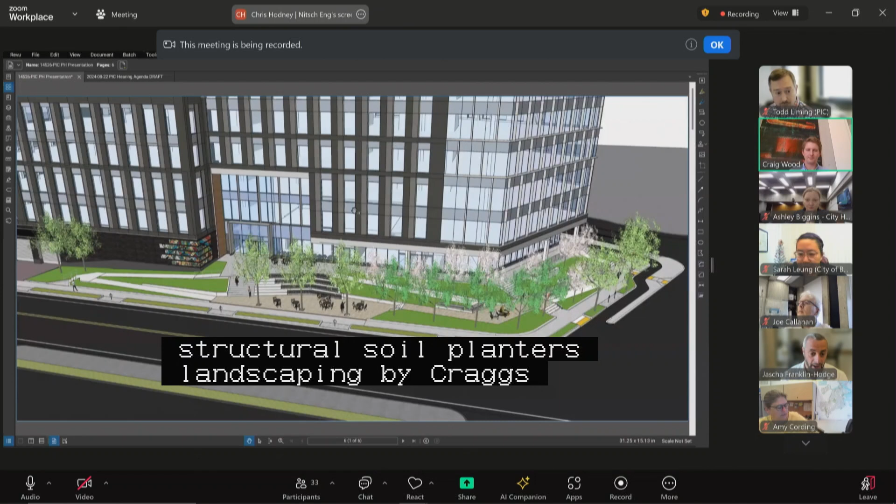Next item of business, public hearing number 1 on a joint petition by 22 Dry Dock LLC and the Boston Economic Development and Industrial Corporation for the making of specific repairs within the following public ways in South Boston, consisting of curb realignment, roadway and sidewalk reconstruction, new and relocated pedestrian ramps, specialty pavement, street lighting infrastructure, street trees and structural soil, planters, landscaping, bike racks, driveway curb cuts, and protected bicycle facilities. Dry Dock Avenue, generally at address number 22 west of Tide Street; Northern Avenue, generally at address numbers 331 to 339 northeast of Tide Street; Tide Street between Dry Dock Avenue and Northern Avenue. This was new business on August 8th, as shown on a set of plans entitled City of Boston Public Works Department Engineering Division Specific Repair Plan, Dry Dock Avenue, Tide Street, Private Way, South Boston, 5 sheets dated February 2024.

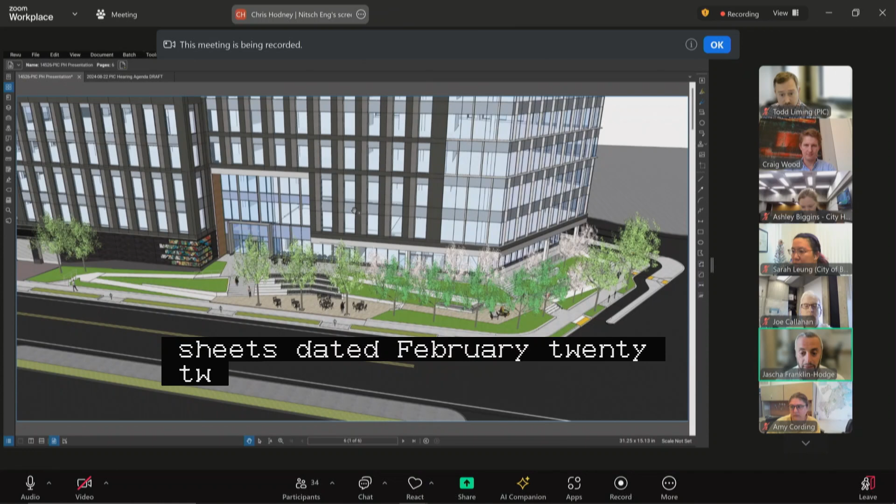Would the proponents please introduce themselves, their affiliations, give us a very brief reintroduction to this project, and let us know about any changes since your new business hearing.

Good morning, my name is Chris Hodney. I am with Nitsch Engineering. I'm joined here by Craig Wood and Paul Flores from Related Beal. 22 Dry Dock Ave, we were here two weeks ago for the new business hearing. It is a life science building in the Boston Marine Industrial Park, at the location of the old 22 Dry Dock building. Same address, but where there was a bunch of city offices, adjacent to the EDIC garage.

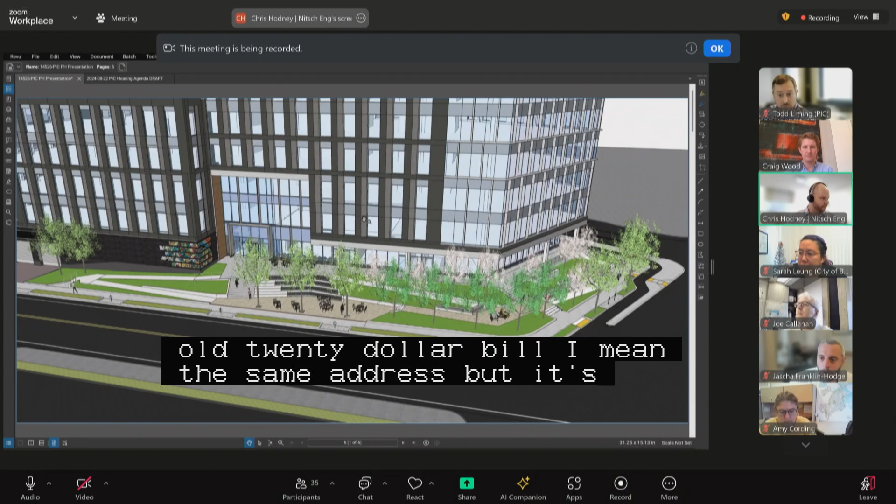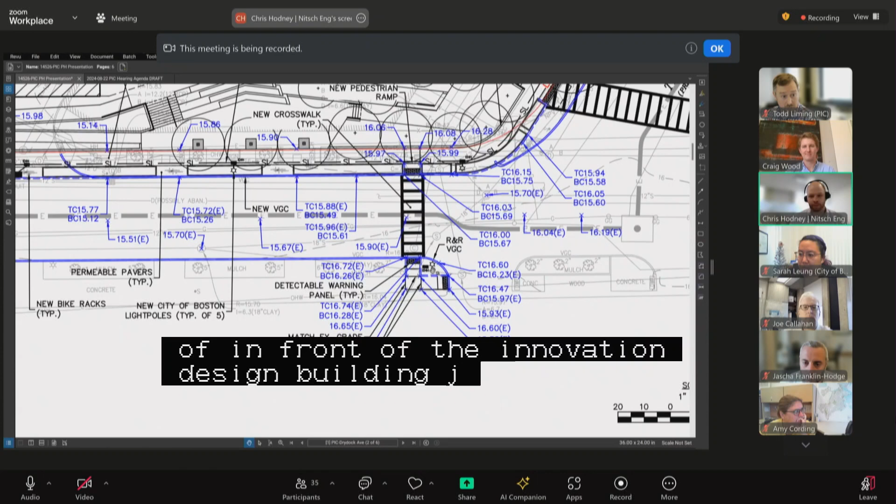Essentially, it's new streetscape work. We're closing a few curb cuts, adding some improvements to the sidewalk. Not widening the sidewalks, but adding greenscaping and landscaping improvements, and general sidewalk improvements. We do have a couple changes since the previous hearing. Todd had sent us some comments from the Public Works Department, which we addressed. We added the reconstruction of this ramp in front of the Innovation Design Building, since it was probably going to be destroyed through our construction anyway, so we figured we might as well reconstruct it. We also added a detail for this other ramp, a request that was made at the previous hearing. We noted on the plan that these reciprocal ramps are supposed to be replaced by the 24 Dry Dock project, but if that project doesn't go forward, this project will install compliant ramps. Those are the only changes we've made since the previous hearing.

So I'll open it up to any questions. Thank you very much, appreciate those updates. Commissioners, questions?

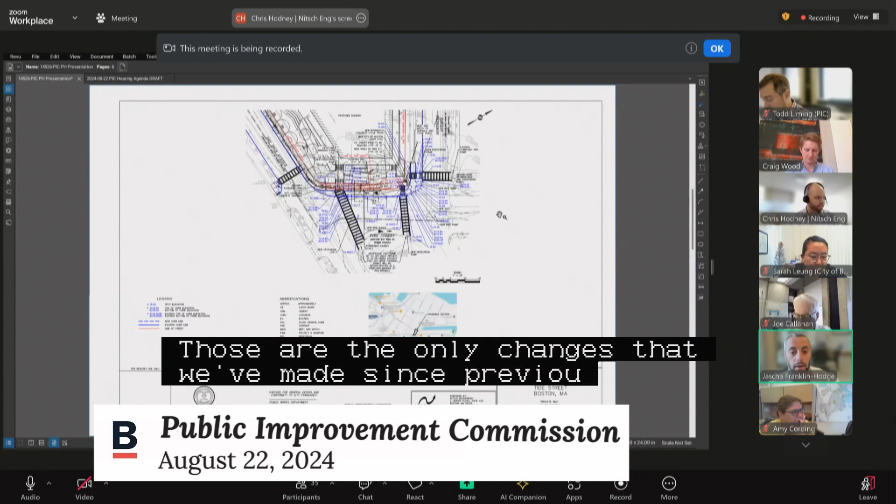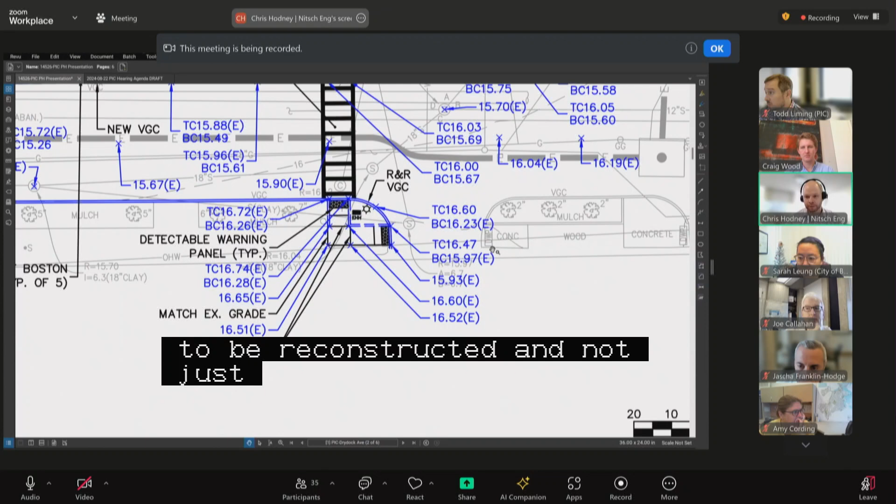Thank you so much for the presentation. With the reconstruction of the paired ramp that was added between new business and public hearing, will the reciprocal ramp also be reconstructed? The reciprocal ramp looks to be compliant based on the survey that we have, so I don't think it needs to be reconstructed — the tactile warning strip is in place and it has a slope that is currently compliant. Could we add a note if it is compliant just to the plans, to ensure that it's documented? Sure.

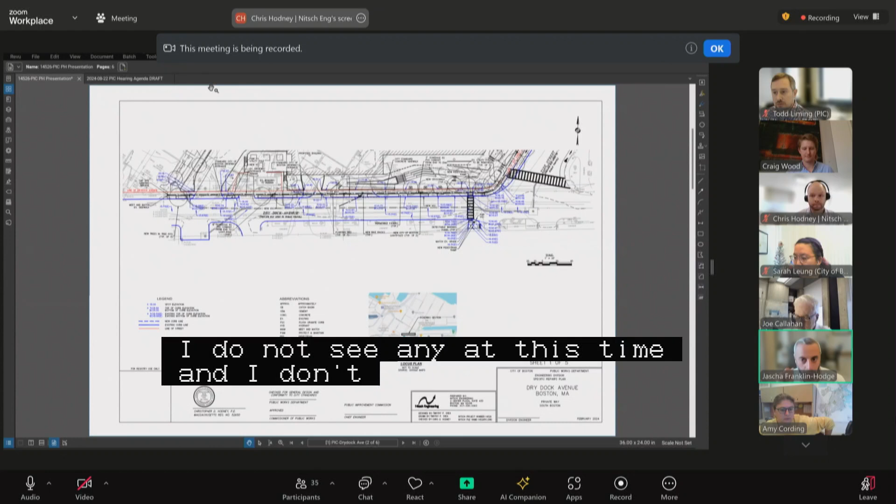Do I hear a motion to approve public hearing number 1? I'll make a motion to approve a joint petition by 22 Dry Dock LLC and the Boston Economic Development and Industrial Corporation for the making of specific repairs in Dry Dock Ave, Northern Ave, and Tide Street, as read into the record by the chair. Second. All in favor? Aye. Aye. Any opposed or abstain? So moved.

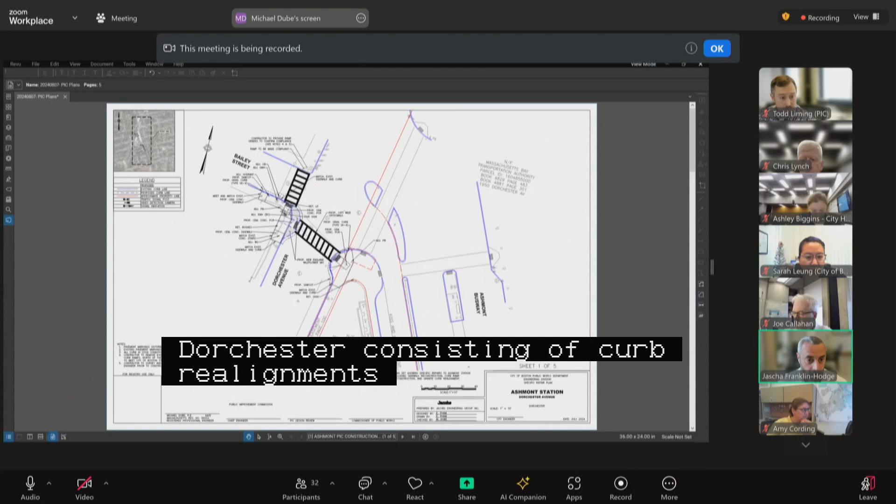On to public hearing number 2, on a petition by the Massachusetts Bay Transportation Authority for the making of specific repairs within the following public ways in Dorchester, consisting of curb realignment, sidewalk reconstruction, as well as new and relocated pedestrian ramps and green stormwater infrastructure: Dorchester Avenue, generally at Bailey Street at Dorchester Avenue, and Huron Path between Beale Street and Van Winkle Street. This was new business on August 8th, as shown on a set of plans entitled City of Boston Public Works Department Engineering Division Specific Repair Plan, Ashmont Station, Dorchester Avenue, Huron Path, Dorchester, 5 sheets dated July 2024.

Would the proponents please introduce themselves, their affiliations, and give us a brief reintroduction to this project, along with any updates from your last hearing. Good morning, Commissioners. I'm Mike Dube. I work with Jacobs, and I'm here on behalf of the MBTA. Can you see my screen? We can. Perfect, so I'll give a brief introduction to this project.

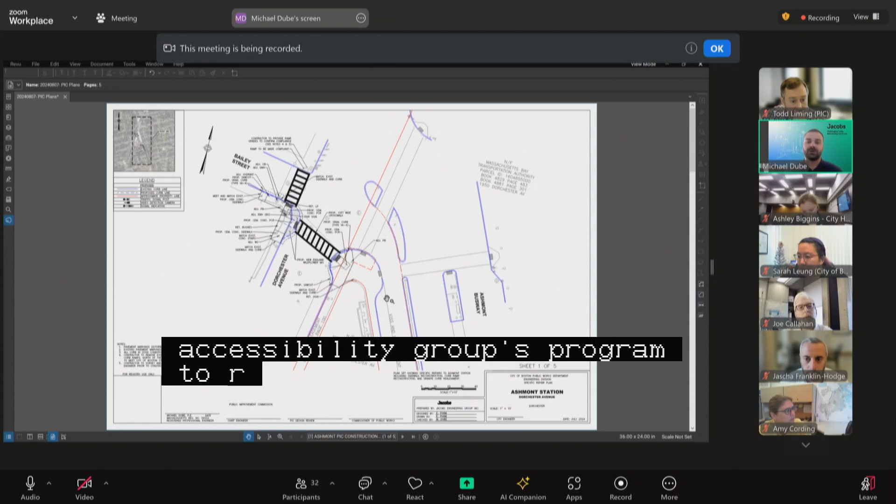These repairs are being completed on behalf of the MBTA's System-Wide Accessibility Groups program to remove barriers to accessibility at multiple locations throughout the MBTA system. The improvements here today are for 2 locations around the MBTA Ashmont station. The first location, as shown on the screen, is at the intersection of Dorchester Ave, Bailey Street, and the Ashmont busway exit. The improvements propose to reconstruct the pedestrian ramps at the southeastern and southwestern corners of the intersection and to confirm compliance of the reciprocal ramps. There are additional improvements being made within the MBTA busway as part of this project that will connect to the improvements shown on these plans.

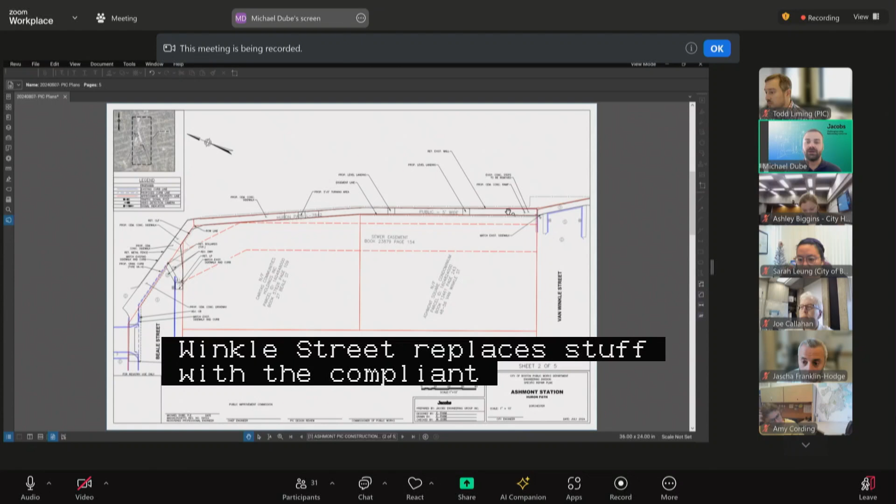The second location is along the Huron Path between Beale Street and Van Winkle Street. The improvements propose to remove the existing steps at Van Winkle Street and replace them with a compliant pedestrian sloped walkway to remove that staircase barrier of accessibility. Since the staircase is over at Van Winkle Street, we're also proposing to reconstruct the path between the staircase and Beale Street, providing a compliant cement concrete sidewalk. It's worth noting that this path is located within an existing 5-foot wide city easement.

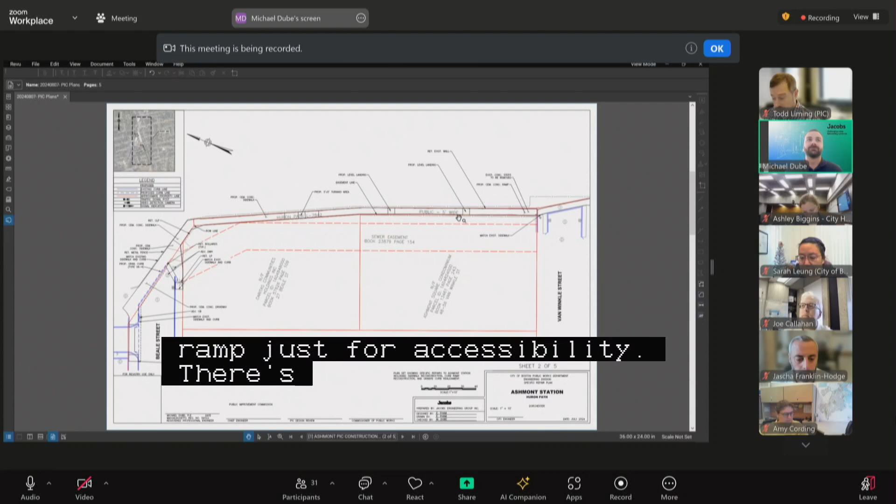At our last hearing, there were questions regarding the maintenance of this path. The MBTA currently performs snow removal along this path and will continue to do so in the future, so that is something we are going to note. There was also a comment from the planning department to refer to the sloped walkway here as a sloped walkway rather than a ramp, just for accessibility, since there's a difference in how those are noted, so we'll make sure that makes it into the final plans. That's the project here in front of you today.

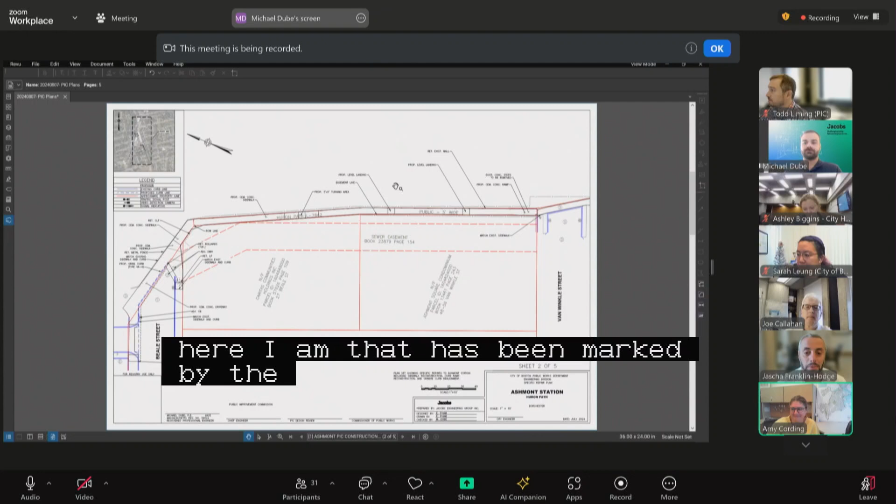With that, do I hear a motion to approve public hearing number 2? I'll make a motion to approve a petition by the Massachusetts Bay Transportation Authority for the making of specific repairs in Dorchester Ave, Bailey Street, and Huron Path, as read into the record by the chair. Second. All in favor? Aye. Aye. Aye. Any opposed or abstain? So moved. Thank you very much.

Awesome, thank you. On to our next item of business, public hearing number 3, on a petition by Vicinity Energy Boston Incorporated for grant of location to install a new steam distribution main and associated infrastructure with city shadow within the following public ways in South Boston: Binford Street, generally between A Street and Necco Street, and A Street at Binford Street. This was new business on August 8th, as shown on a set of plans entitled City of Boston Public Works Department Engineering Division Grant Application Plan, 244 to 284 A Street, Boston, 21 sheets dated April 19th, 2023.

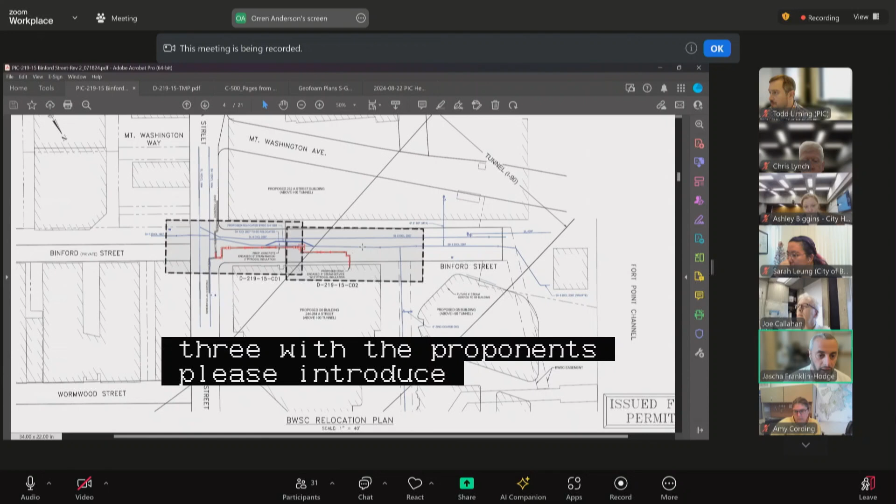Would the proponents please introduce themselves, their affiliations, and give us a brief reintroduction to this project, along with any updates since your last hearing. Good morning, my name is Don Silvia. I'm the Regional Vice President at Vicinity Energy here in Boston. We appreciate this opportunity to present the proposed expansion as previously shown in new business. Along with me today are Trimont Engineering's Ken Stanley and Orren Anderson, representing Vicinity in this project, along with my engineering staff, Jason Clark and Matt Keogh. I'll turn it over to Orren for the details on the project.

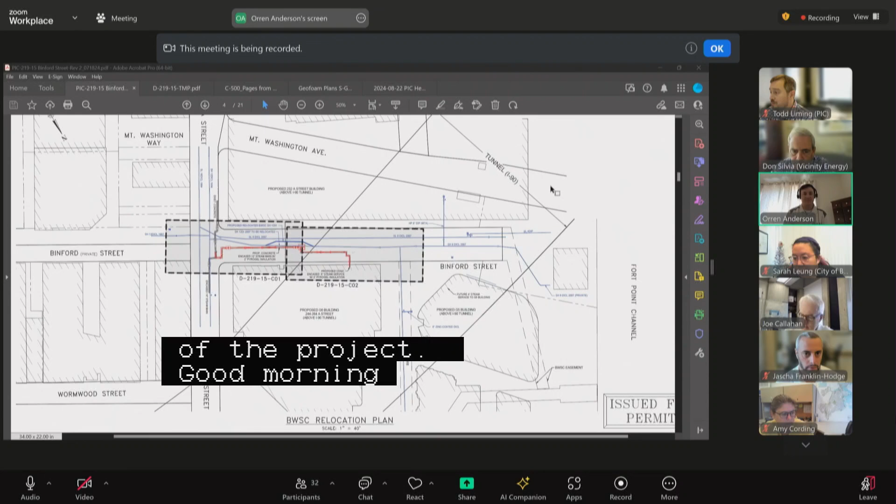Good morning, everyone. There have been no changes to this plan set since the first meeting. We had a successful meeting last week with Tom Reddy and Community Outreach discussing traffic patterns and construction layout. Otherwise, there have been no improvements based on any comments from this committee.

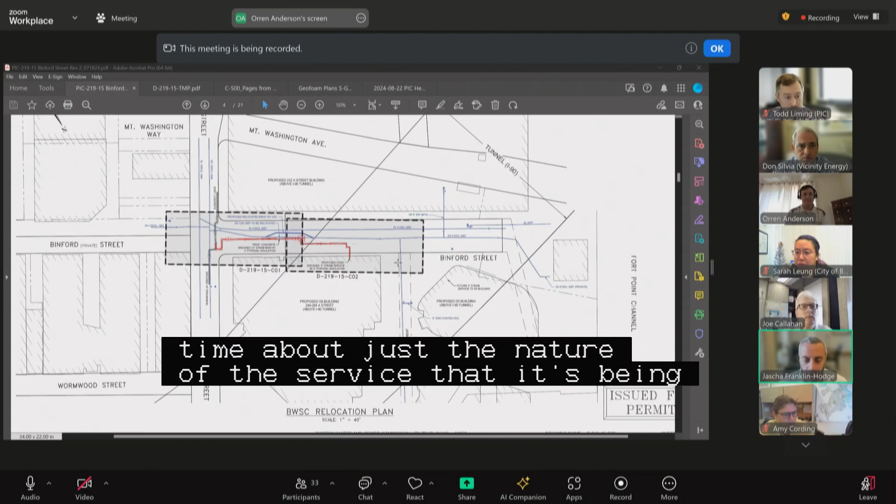All right, commissioners, questions? If I'm recalling correctly, and forgive me if this is repetitive, I believe there was a question last time about the nature of the service being purchased here and what could be shared, if anything, with the commission about that. So I want to see if there's any additional information about the nature of the steam product you're able to share with us.

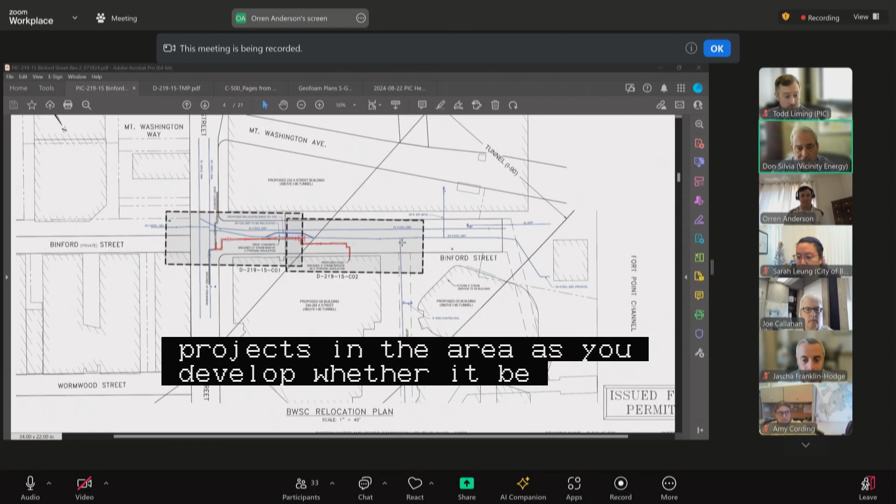No, thank you for the reminder. I did go back and check, so a couple of things. We've confirmed that this infrastructure will be capable of carrying 100% of our e-steam product, and other products that will be carbon-free. Discussions with the developer are still ongoing, so as far as the exact breakout, I don't really have that for you. I did also confirm that other projects in the area as they develop, whether related projects close to this or along A Street, up in the Gillette area, will also be able to enjoy that benefit. So I hope that answers your question.

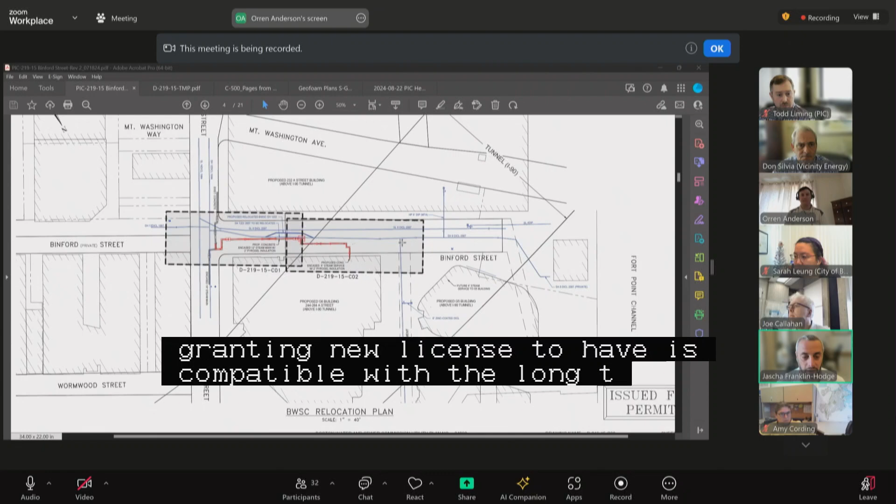Yeah, with appreciation for the limits of what may be known or shareable in a context like this, I think that is helpful, and I'm glad to see this system expansion is compatible with the goals you've set forth around electrification and decarbonization of the steam product. That process will take some time and involve many stakeholders and isn't fundamentally in the purview of the commission, but we want to make sure the infrastructure we're granting you license to have is compatible with the city's long-term decarbonization goals. So I appreciate that update and the continued work on that aspect of your service portfolio. And we also appreciate your interest.

Indeed. So with that, PIC staff or members of the public? Tom Reddy, Fort Point Neighborhood Association, please go ahead. Yeah, thanks, Todd, members of the commission.

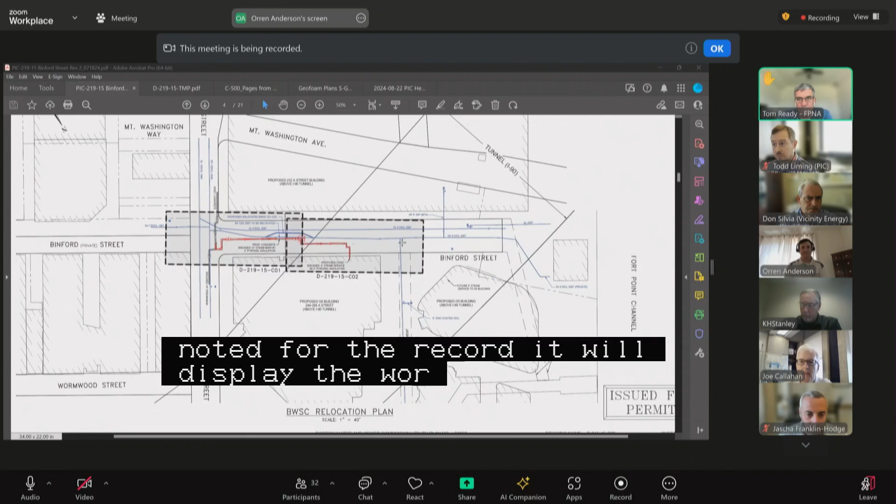We did meet, as Orren indicated, on August 14th last week. Did a site walk with the Vicinity team. We appreciate them setting time aside for us. We discussed a few things and agreed on a few things. I just want to make sure we get it noted for the record: the work will displace 24-hour resident parking. Vicinity agreed to purchase and bag city meters along A Street, totaling around 17, while the work is underway, to replace the resident parking that will be displaced.

We discussed the vacuum truck work that will probably be needed, not to start prior to 9 a.m. because it is pretty noisy and the work area is adjacent to a multi-residential building. Don, I just ask you not to also do it on Saturdays.

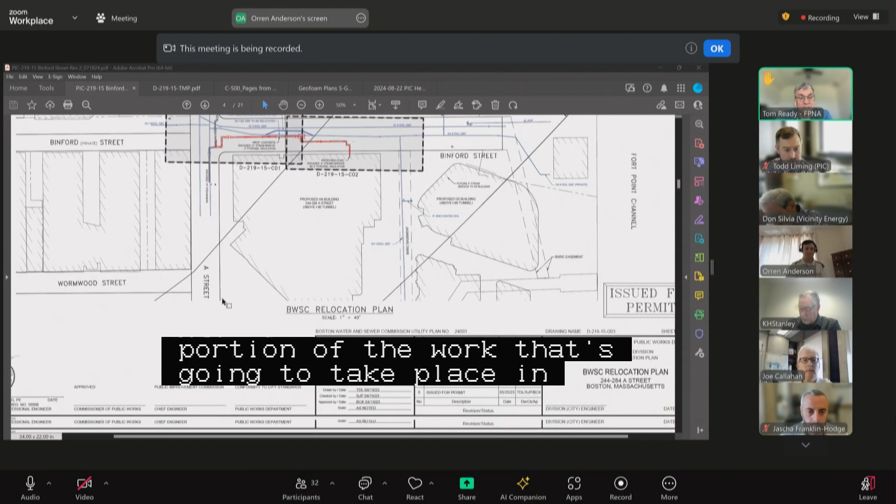And then lastly, along A Street, there's a portion of the work taking place in proximity to the curb line on A at the intersection of Binford. There's a cycle path that runs along that curb line. When the hole is dug, we were concerned about the safety of cyclists going down A Street, and Vicinity was going to work on a hard solution, not just cones, to protect folks from falling in. So those were the three things that were covered.

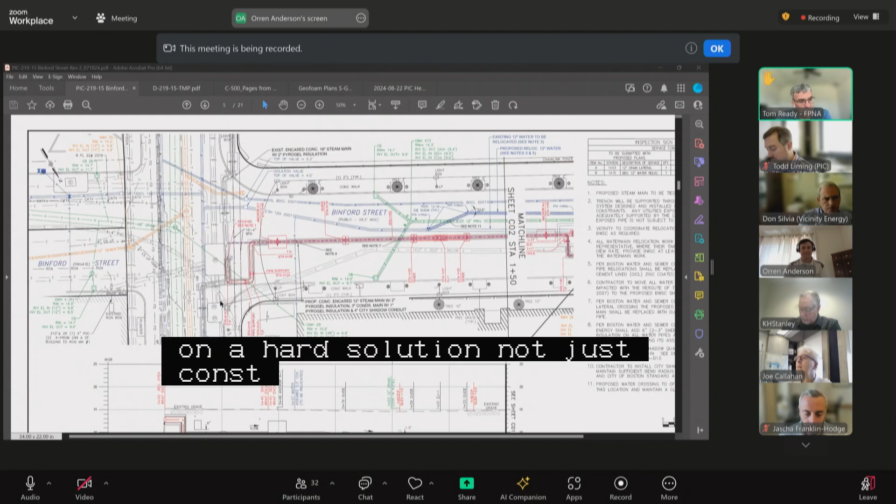So Don, hopefully recapping what the conversation was. I think you accurately captured it, Tom, and as with the last time we worked out there, it's a fluid situation, and we pledged to work alongside the neighborhood to make sure we're meeting your needs. Totally agree, Don, thank you. And so with that, we're in support of the project, Chief.

Thank you very much, Tom, as always, for your diligence and attention to things happening in the neighborhood. I really appreciate it. PIC staff, Todd, anything else? No, I will just mention for the record that the project confirmed they are working with MassDOT on any potential impacts to the highway tunnel in this area.

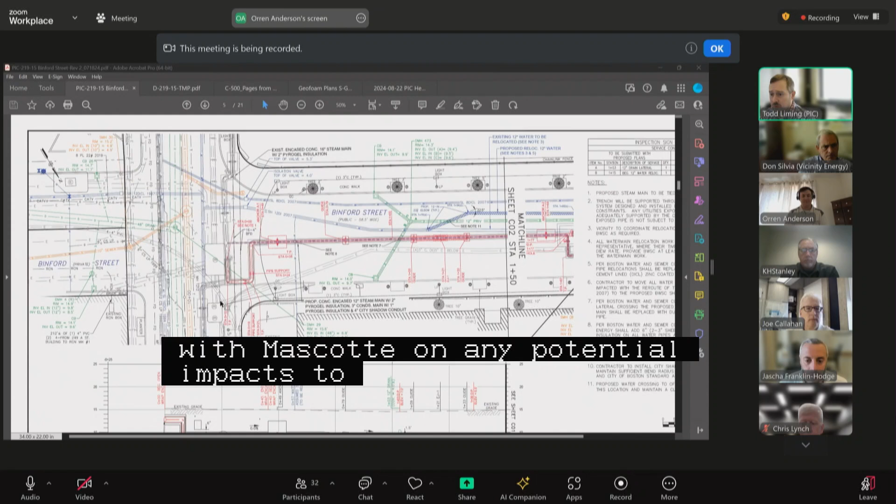Don, feel free to add to that if you want, but I have no concerns with that at this time. No, I would just say that the project's in the SHAP process right now, and they have issued questions and we have issued answers. So I think right now the ball is somewhat in MassDOT's court.

All right. Hearing nothing else, do I hear a motion to approve public hearing number 3? I'll make a motion to approve a petition by Vicinity Energy Boston Inc. for a grant of location in Binford Street and A Street as read into the record by the chair. Second. All in favor? Aye. Aye. Any opposed or abstain? So moved. Thank you very much. Thank you. You all. Appreciate it.

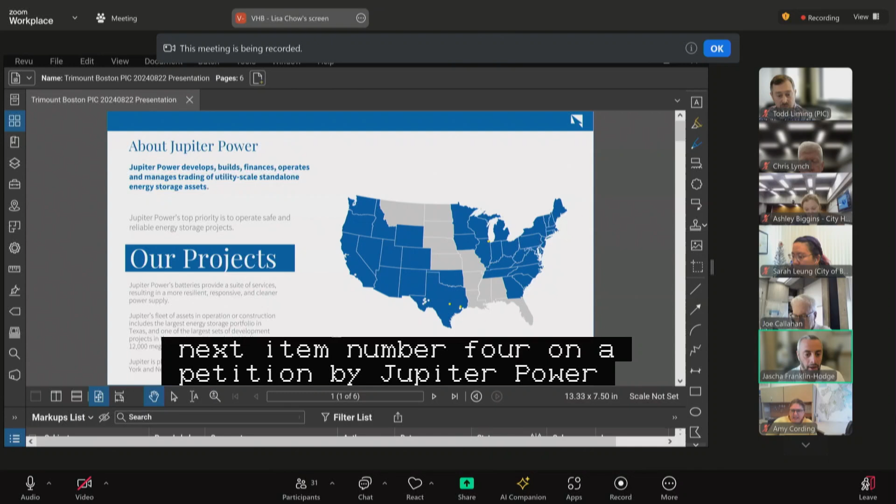Right, on to our next item, public hearing number 4 on a petition by Jupiter Power LLC, DBA Trimount ESS LLC for a grant of location to install a new electric duct bank and associated infrastructure with city sidewalk within the following public ways in Charlestown: Alfred Street southwest of Dexter Street between Alfred Street and the City of Everett boundary. This was new business on August 8th, as shown on a set of plans entitled City of Boston Public Works Department Engineering Division Grant of Location Plan, Alfred Street, Dexter Street, Charlestown, 3 sheets dated April 23rd, 2024.

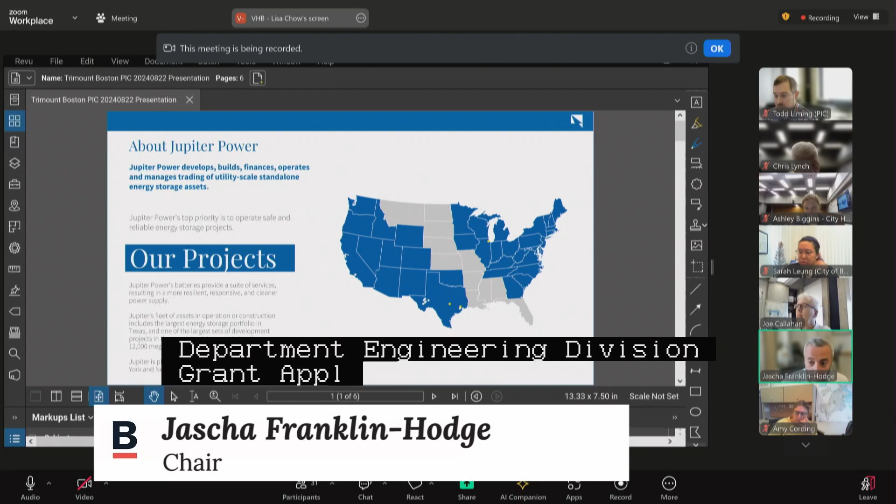Would the proponents please introduce themselves and their affiliations, give us a very brief reintroduction to the project, as well as any changes or follow-ups from your last hearing.

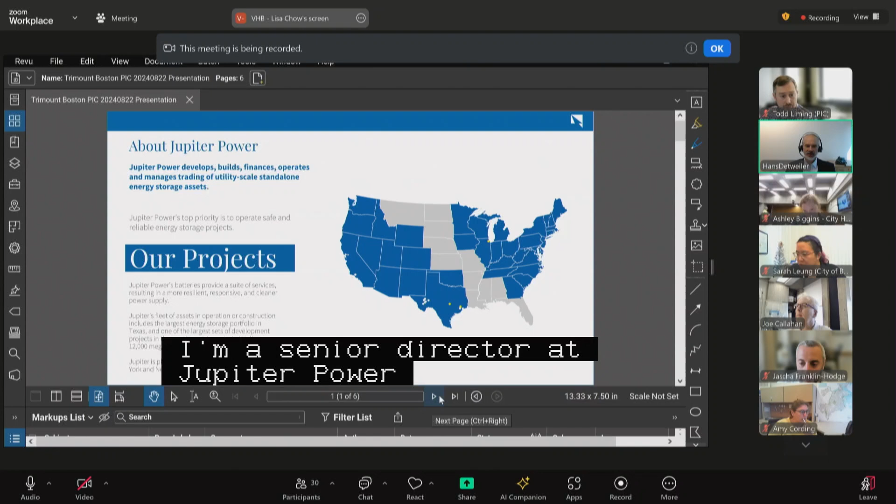Good morning, everybody. My name is Hans Detweiler. I'm Senior Director at Jupiter Power. I'm the lead project developer on the site, and I'm joined today by Lisa Chow, who's an engineer at VHB and is helping us with this, as well as Alexis Kachuk, who is our counsel.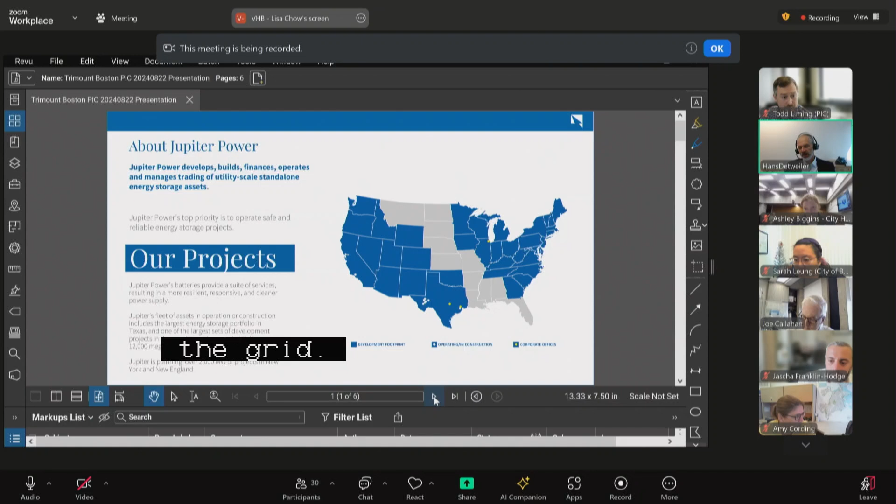To briefly restate the company and the project, Jupiter Power is an owner, operator, and developer of battery energy projects that provide wholesale services to the grid. We provide battery energy projects that support the entire grid, not behind-the-meter projects that support individual companies. We're very happy to be here and looking forward to having a flagship project in Boston and Everett and in the Commonwealth of Massachusetts. Next slide, please.

Briefly restating the purpose of the project, batteries are very fast acting and provide a number of grid resiliency services. Primary purpose of the project is to support the decarbonization and the transition of the grid to wind and solar resources as the primary energy resources on the grid. Those are fantastic resources, but they're not always dispatchable. You can't always turn them on when you want if there's no wind or solar available, so batteries play that role.

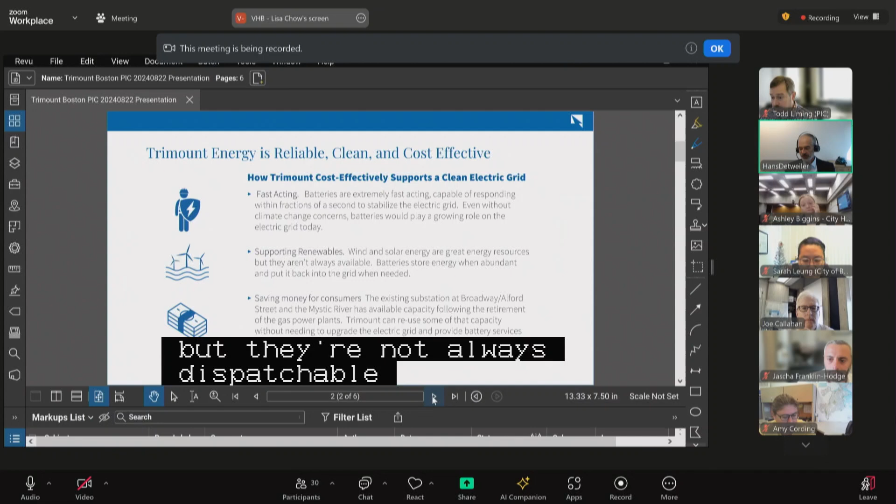The location of the project is very much not an accident. We're located in close proximity to the Mystic Electric substation. This substation, if it was a highway, would be an interstate highway intersecting a couple of significant state highways. It's a very robust location, and there's an anticipation there will be future offshore wind delivered into the site as well, with an ideal location for battery energy storage. Next slide.

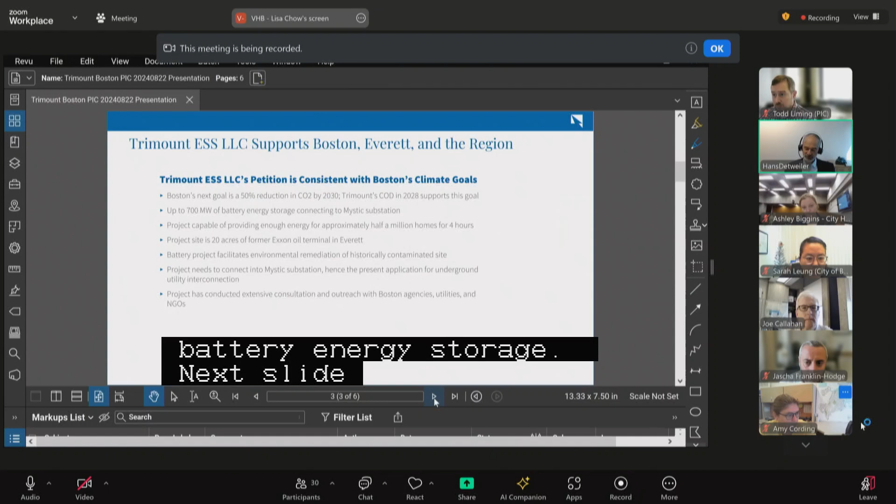As I mentioned, the project is very consistent with decarbonization activities and is certainly consistent with Boston's climate reduction goals. The project would be approximately 700 megawatts, which is about enough energy to power 500,000 homes for about 4 hours. The project will support the remediation of a historically contaminated site.

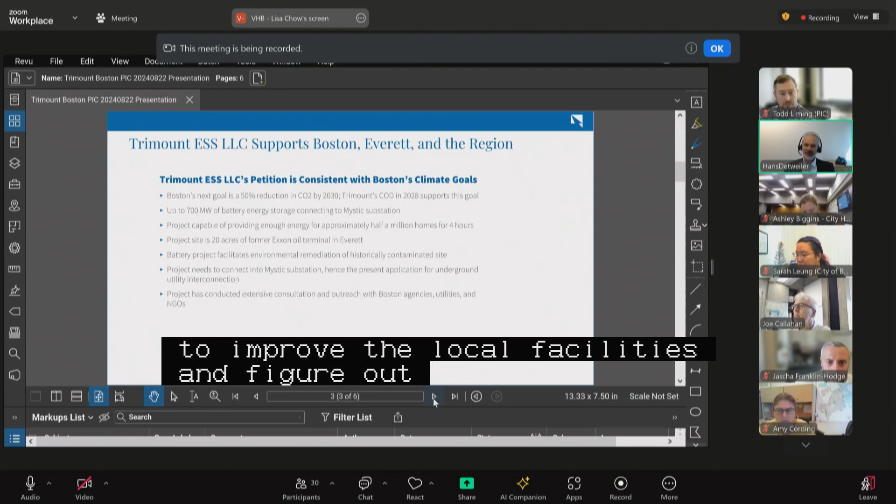In terms of updates since the last time we spoke, one, I'm happy to say that the project has been endorsed by the Sierra Club, so we're pleased to have that support. And second, there was some discussion at the last hearing about needed improvements in the area, and Jupiter Power is happy to commit to working with the city and other stakeholders to improve the local facilities and figure out what makes the most sense in those areas. I did come to work this morning on a 10-mile bike ride, 9 miles of which was public bike paths, so personally happy to support improved infrastructure.

Excellent. Thanks very much. I hope it was a nice day for a ride. I hope you enjoyed it. We appreciate that and appreciate the willingness to work with the team on those infrastructure changes if the opportunity presents itself.

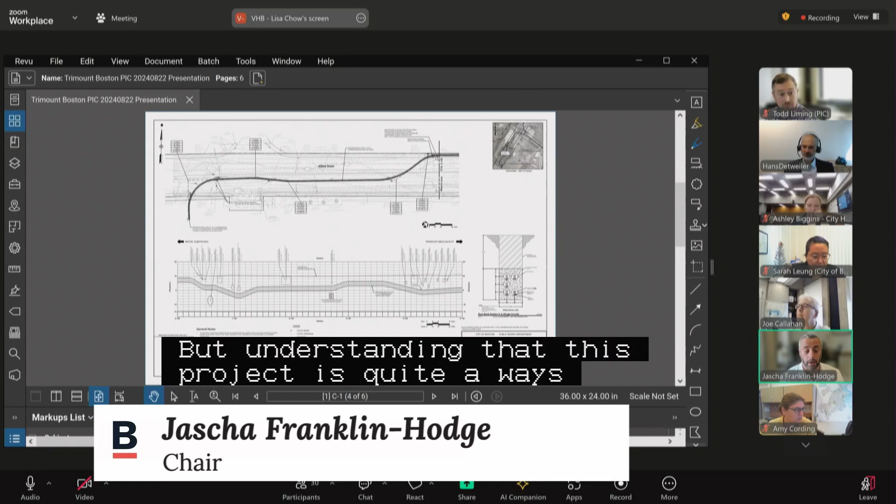And as has been discussed, I think we know that typically we like to approve grants of location and any accompanying specific repairs at the same time, but understanding that this project is quite a ways from construction and that the grant of location is an important step in the larger regulatory approval process for this project, we're happy to separate those things out with the commitment that you will work with our teams to look for opportunities and then, as appropriate, come back for administrative or full review of any changes that are deemed to be appropriate to accompany this project.

All right, with that, commissioners, any questions, comments? Oh, yes, this is Denise Devon from Boston Water and Sewer. I just received a few comments. For today's petition, we're just going to say it's contingent upon our approval, that there are just a few minor comments that need to be addressed through the engineering customer service process. Thank you.

All right, commissioners, other comments or questions? PIC staff or members of the public? No, all set.

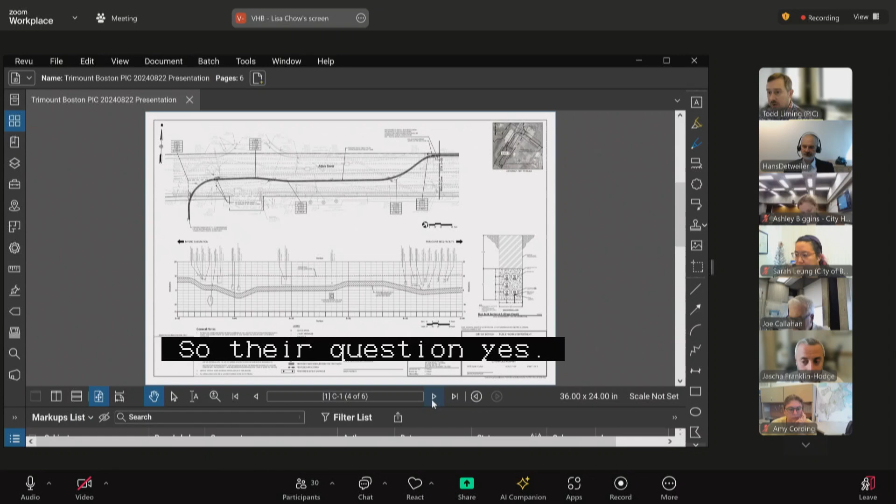With that, do I hear a motion to approve public hearing number 4? I'll make a motion to approve a petition by Jupiter Power LLC, DBA Trimount ESS LLC, for a grant of location in Alford Street and Dexter Street, as read into the record by the chair.

Second. All in favor? Aye. Any opposed or abstain? So moved. Thank you very much, and good luck with the next steps along the way with this project. Thank you, we look forward to working with you.

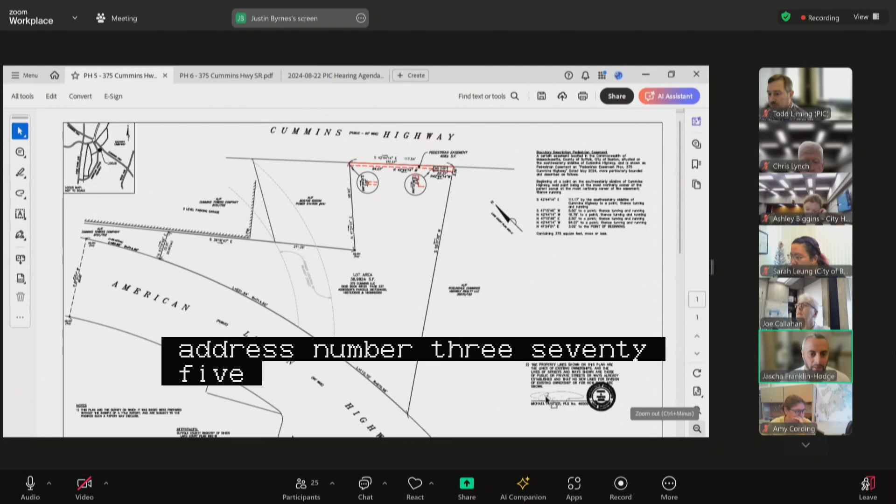Likewise. On to our next item, public hearing number 5, on a petition by 375 Cummins LLC for the acceptance of a pedestrian easement adjacent to Cummins Highway Public Way, West Roxbury, located on its southwesterly side at address number 375, generally southeast of Mount Calvary Road. This was new business on August 8th, as shown on a plan entitled City of Boston Public Works Department Engineering Division Pedestrian Easement Plan, 375 Cummins Highway, Public Way, Roslindale, one sheet dated May 2024.

Would the proponents please introduce themselves, their affiliations, give us a brief reintroduction to the project and this specific action, and any changes since your new business hearing.

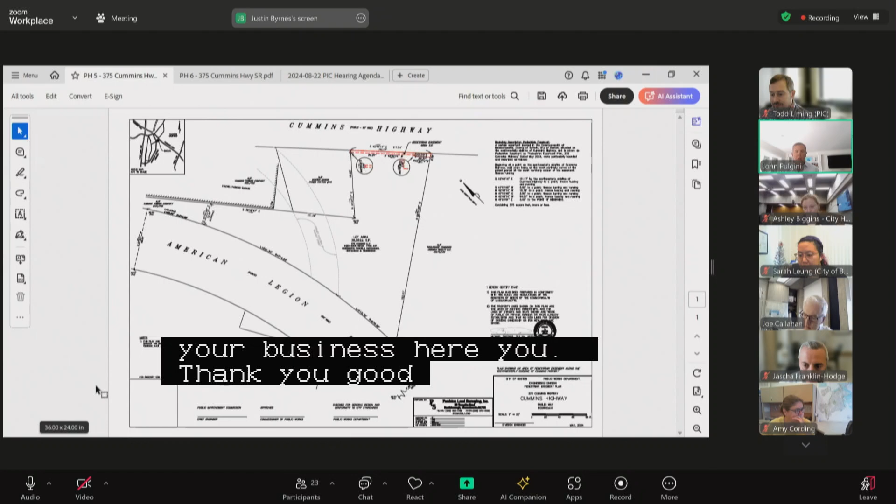Sorry, I was on mute. Thank you. Good morning, Commissioner, Franklin-Hodge, PIC members and staff. I'm Attorney John Pulgini on behalf of 375 Cummins LLC. Thank you for having us here this morning.

We have 2 actions before you this morning. The first is a pedestrian easement that we will be granting to the city. This easement will provide 6 feet of depth of the project's frontage to allow for a 10-plus foot sidewalk width in front of the proposal.

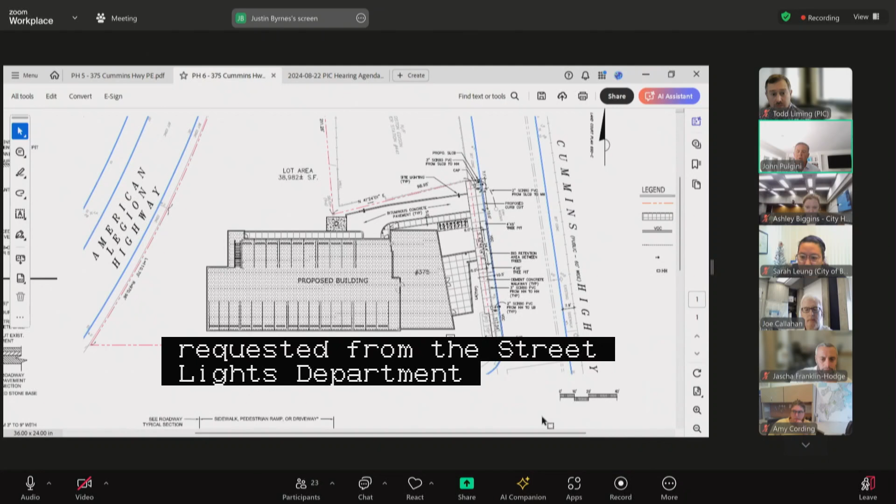The second is our specific repairs plan, which provides the following public realm improvements: new siding and sidewalks and granite curbing the length of our site, a curb cut to access our garage, the installation of 2 new street lights requested from the Street Lights Department, 3 pedestrian ramps—2 of which will be on either side of the Stop and Shop driveway, and 1 across the street, requested from Disabilities—and 2 new street trees contained in 6x4 tree pits.

We had been working with the BPDA. As you know, one of our public realm commitments was to put a bus shelter across the street on the other side of Cummins Highway. Unfortunately, the sidewalk is only 7 foot 9 inches there, so that did not work. However, our BPDA board memo provided for a $41,000 commitment in public realm improvements, and we have added to that significantly—approximately over 80% more than what we originally signed on to.

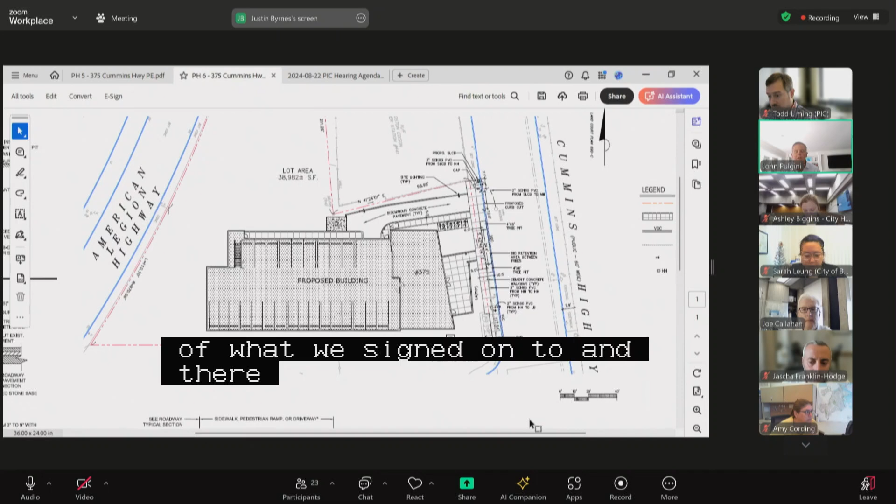That leaves a $51,000 commitment for public realm improvements outside of the physical items under the specific repairs. That money can be used toward replacing the sidewalk across the street, or perhaps toward the island at the intersection of Cummins, American Legion, and Canterbury, as requested by Ms. Beaton at our last new business hearing. Thanks, I'm here to answer any questions.

Thank you, John. This particular action is the pedestrian easement, but we'll take them as 2 items—appreciate the overall update on this. No, all good. Commissioners, any questions or comments related to the pedestrian easement?

All right, hearing none. PIC staff or members of the public? No, we're all set on the easement. All right, do I hear a motion to approve public hearing number 5?

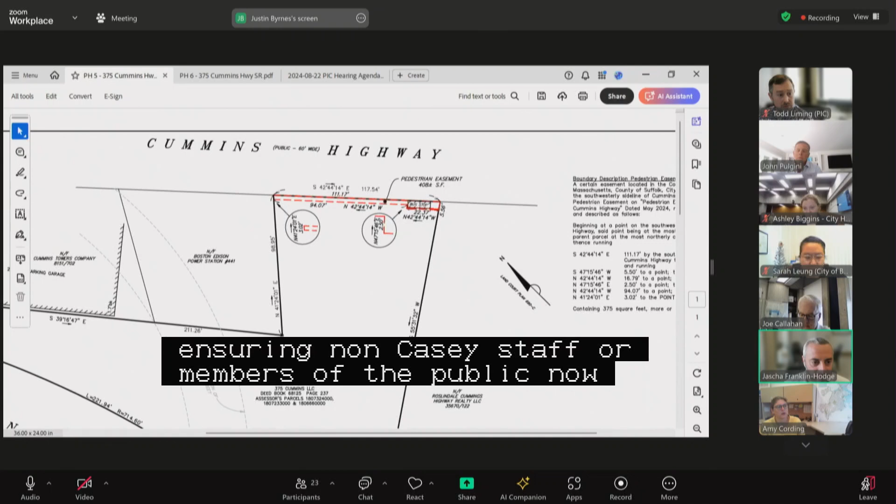I'll make a motion to approve a petition by 375 Cummins LLC for the acceptance of a pedestrian easement in Cummins Highway, as read into the record by the chair. Second. All in favor? Aye. Any opposed or abstain?

So moved. On to public hearing number 6, on a petition by 375 Cummins LLC for the making of specific repairs within Cummins Highway, Public Way, West Roxbury, generally located at address number 375, generally southeast of Mount Calvary Road, consisting of curb and sidewalk reconstruction, as well as new and relocated pedestrian ramps, street lighting infrastructure, street trees with structural soil, green stormwater infrastructure, and driveway curb cuts.

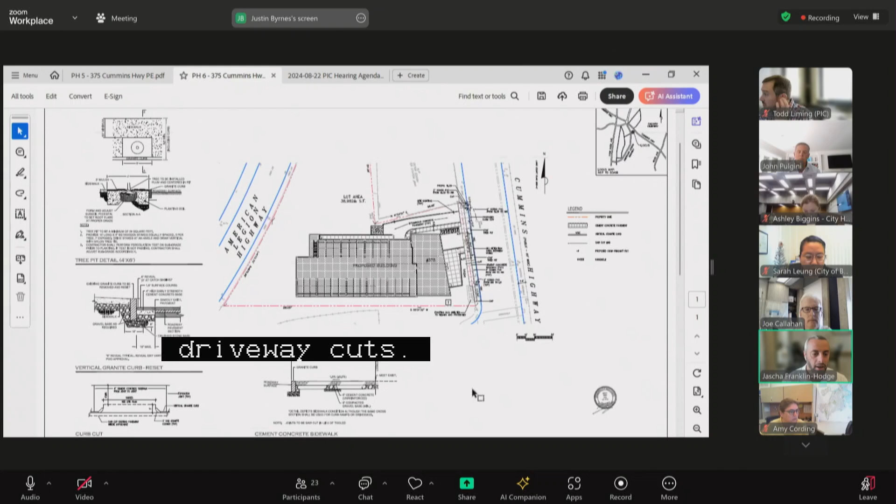This was new business on August 8th, as shown on a set of plans entitled City of Boston Public Works Department, Engineering Division, Specific Repairs Plan, 375 Cummins Highway, Roslindale, 1 sheet dated July 4th, 2024, revised August 5th, 2024.

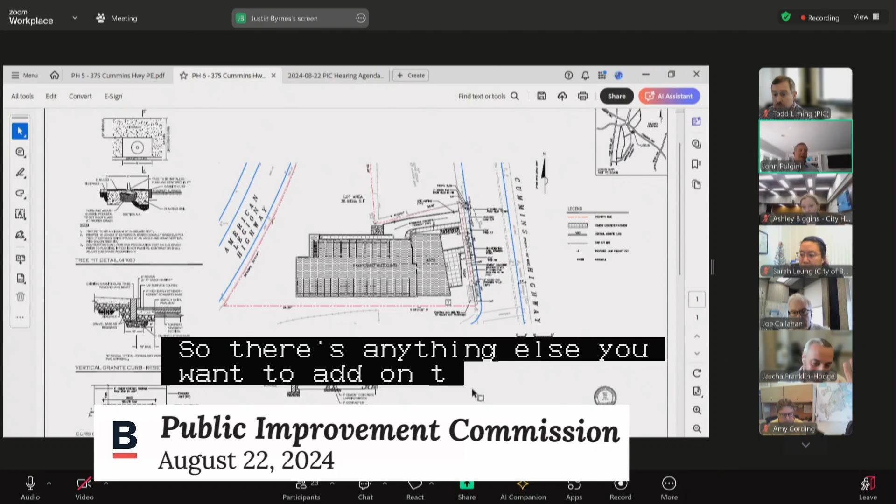Would the proponents please reintroduce themselves and their affiliations? I think we've already had the full overview, so if there's anything else you want to add on this action, otherwise we can jump straight to questions. Thank you, I apologize for that. Again, good morning. Judges, PIC board members and staff, Attorney John Pulgini on behalf of 375 Cummins LLC. We went through what the improvements will be, so I'll stand with that. Thank you very much.

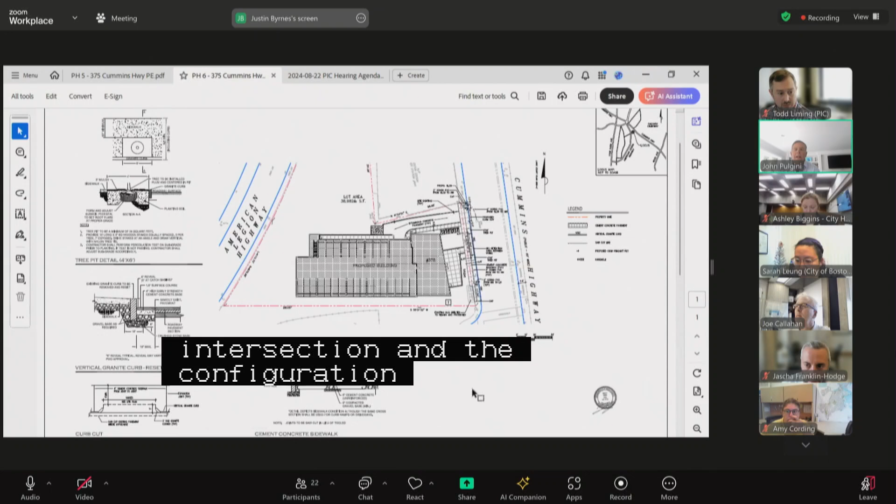Commissioners, questions on these specific repairs? Hi, thank you so much for the presentation. Do you happen to have a plan showing the ramps at the intersection and the configuration of what those would look like? No, we do not. We will have that updated prior to this going to Mylar to be recorded and have that approved by you.

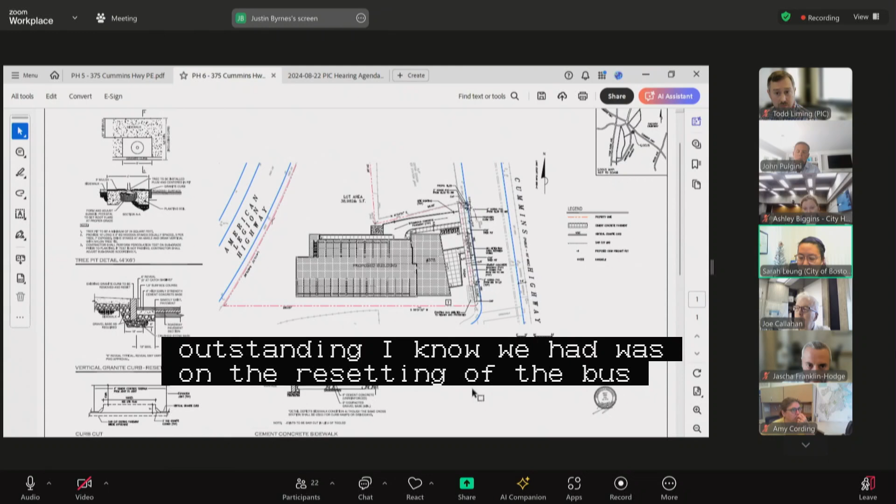Great, thank you. And I think one other outstanding item we had was the resetting of the bus stop to ensure that it's not impinging on the 5-foot path of travel, if that's addressed as well. Exactly correct. So that would be moved back into the easement area to provide for the clear path of travel. Very good question, sorry I didn't bring that up in the presentation.

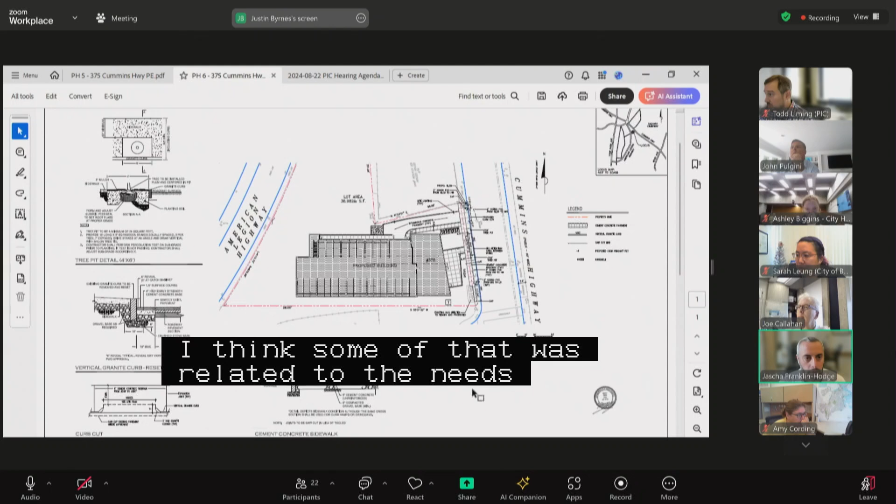All right, commissioners, other questions? Just a question for me. So we heard a couple of folks come to provide public testimony at the new business hearing related to this project. I think some of that was related to the needs of the overall surrounding area. I did hear a concern expressed, or questions asked, about the driveway and the potential for pedestrian vehicle conflicts at the driveway entrance. So I wanted to ask the proponents if there's any additional thoughts in response to those concerns that were raised, or any additional evaluation that's been done to assess the safety of this condition.

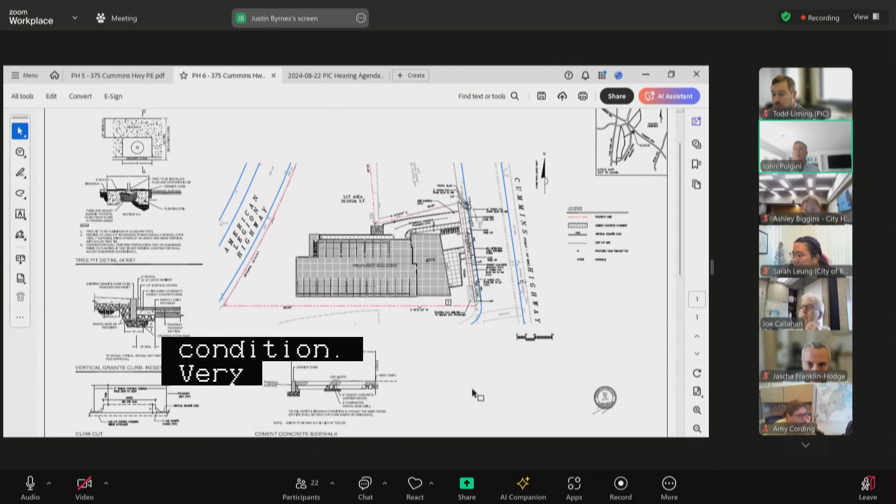Very good question, and I think we will work with BTD in installing some sort of a warning signal to prevent any unfortunate incident from happening there. So we'll work with them, whatever guidance they state we will follow. All right, excellent, I appreciate that willingness to work, and we got some good general feedback from the city on things we can be doing in the neighborhood above and beyond this project. So it's always good to see the public perspective reflected here.

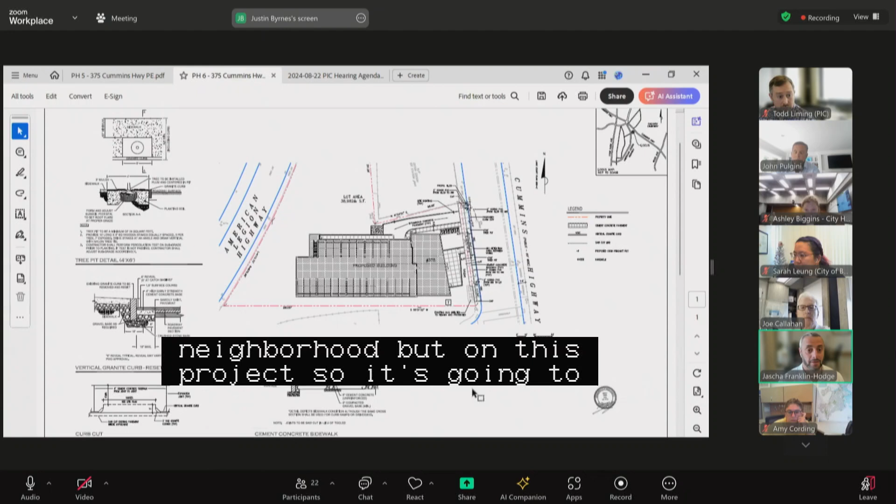All right, PIC staff or members of the public. Just a reminder that we will need those plan updates, as Sarah and John mentioned, before Mylars are submitted. Great, thanks, excellent. Hearing nothing else, do I hear a motion to approve public hearing number 6?

I'll make a motion to approve a petition by 375 Cummins LLC for the making of specific repairs in Cummins Highway, as read into the record by the chair. Second. All in favor? Aye. Aye. Any opposed or abstain? So moved. Thank you very much. Thank you, everybody, enjoy the rest of your day.

All right, on to our next section and final item, new business: 1 Chelsea Street, Terminal Street, Charlestown, specific repairs on a joint petition by the City of Boston Public Works Department and the City of Boston Transportation Department. Would the proponents please introduce themselves, their affiliations, and walk us through what is proposed here?

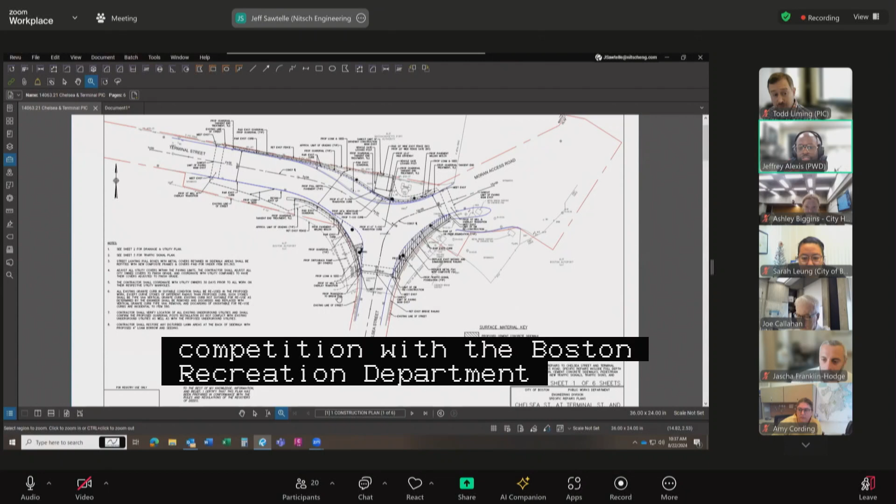Hey, good morning, Chairman, members of the commission. Can everyone hear me? Yes, we can. All right, thank you, Chief. My name is Jeffrey Alexis with the Public Works Engineering Division, co-petitioning with the Boston Transportation Department to propose traffic and signal pedestrian improvements at the Chelsea intersection. I'm joined here by our design consultant, Jeff Sawtelle from Nitsch, and I just want to provide a quick background on the project in coordination with the BPDA, the Autoport, Massport, as well as the Mystic River Watershed Association.

This project was initiated to provide pedestrian access in conjunction with the proposed Harbor Walk extension. Throughout the design process, we have coordinated with all stakeholders and pertinent party members to address pedestrian access while maintaining and not impeding truck access and the operations of the Autoport. With that, I will turn it over to Jeff from Nitsch to go over some of the improvements that we are proposing.

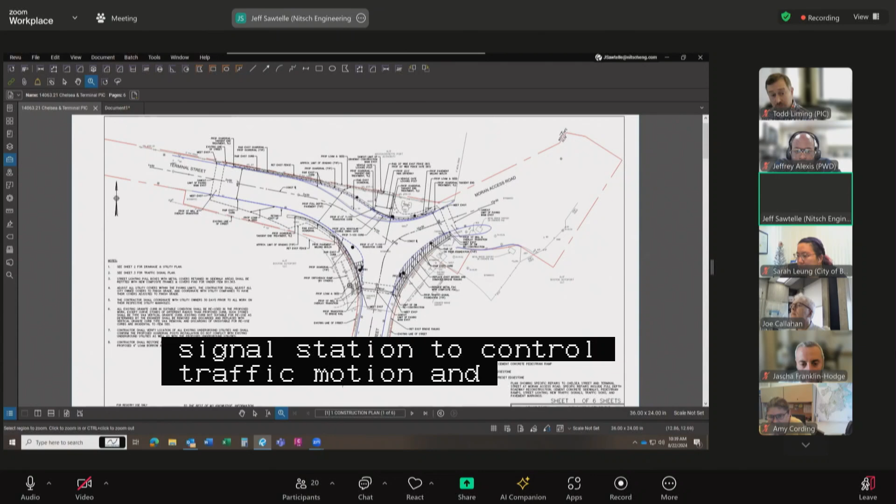Existing curb lines are wide open. There's a lot of pavement, a sea of pavement coming off this bridge here. We are going to tighten up the intersection at Terminal and Chelsea, make it more of a T, provide some signalization to control traffic motion, and provide pedestrian access to the new path along the Little Mystic Channel here, performed by a third party. There'll be some sidewalk widening, curb line relocation along the north edge of Terminal Street to account for straightening the intersection.

And an exclusive pedestrian phase for the crossing at Chelsea Street here. Not sure, I guess that's it. I'll open up to questions, I guess.

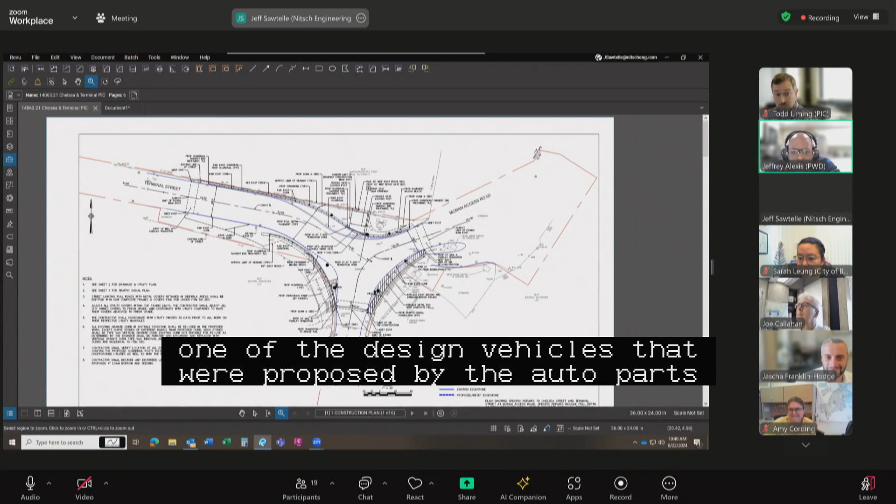Yeah, and I'll also add that we're proposing a driveway entrance into the Autoport to accommodate one of the design vehicles proposed by the Autoport. It's a 200-foot trailer to address, I believe, the wind turbine deliveries to the Autoport. So ideally, with the proposal of the traffic signals and the posts, I think it would impede the turning movements of this vehicle. So we wanted to provide direct access from Chelsea Street into the Autoport, and this will be used as needed by the Autoport.

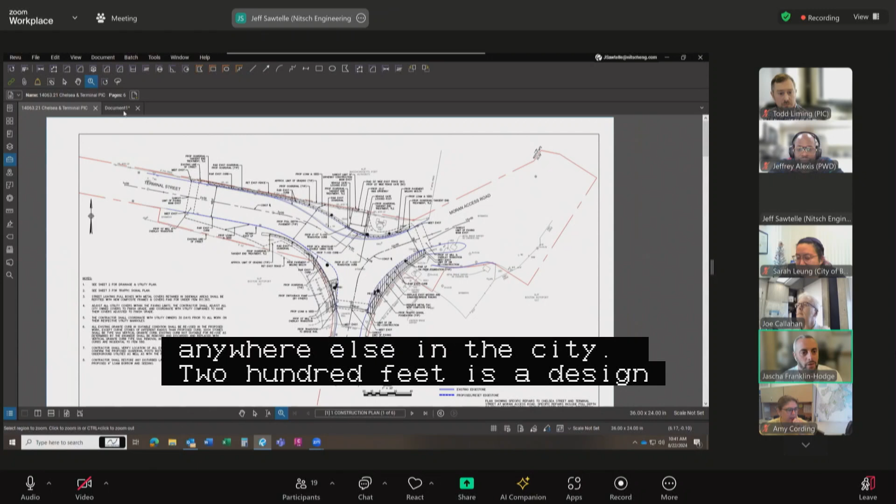Thank you, Jeff, for that. And before I open up to the Commission for questions, I just want to acknowledge how unusual and complex this location is, given some of those distinctive requirements. I don't know anywhere else in the city where 200 feet is a design vehicle length. So I appreciate the work that's been done to try to both accommodate the unique nature and needs of this location while still providing the level of safety for all road users that is so essential everywhere in Boston. Thank you for the work on this. With that, I will open it up to commissioners for questions or comments.

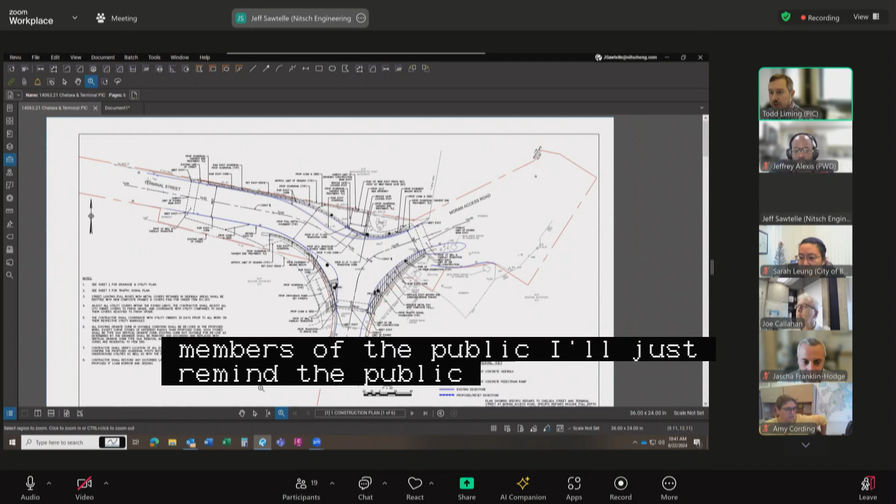Hi, Todd. This is Sarah Lee from Massport. I do not have the raise hand function over here. Would I just be able to respond? Go ahead, Sarah. Thanks, okay, thank you. Hi, this is Sarah Lee, the manager of transportation planning. Just want to thank everybody for presenting this and for sharing the plans. My understanding is that the plans shared today are not totally final, that there's still some comments from Massport that are going to be incorporated. I would just ask that as the plans get finalized, we be looped in to that process so we can have a final set of plans.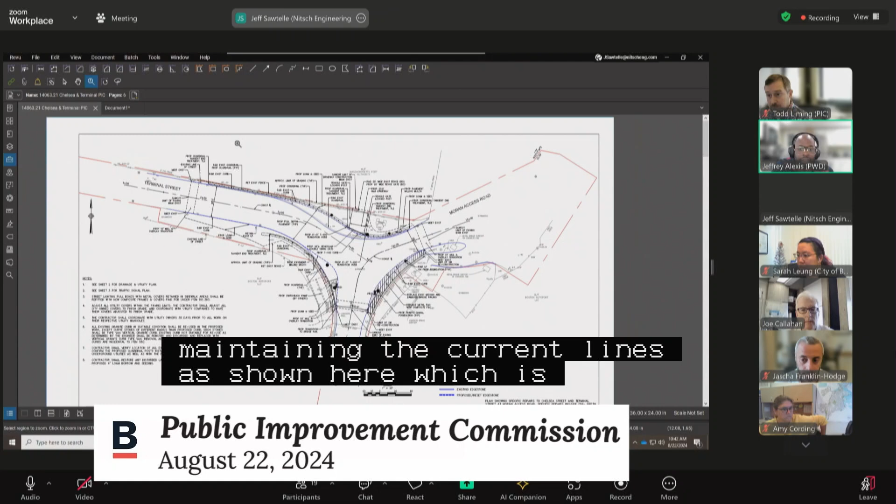Yes, absolutely. There were some comments from Massport. We did look at addressing them, mainly in regards to pavement marking improvements. We are maintaining the curb lines as shown here, which is what we're trying to get through in terms of PIC. But the signal phasing and pavement markings are still ongoing, and will be completed as part of the construction documents. Massport is included on the distribution list for those plans, and we'll provide them. And I'll add you, Sarah. I believe we've been sending them to Connor. So I'll add you to the distribution list as well. That'd be great, thanks. He's on paternity leave. I appreciate that, thank you.

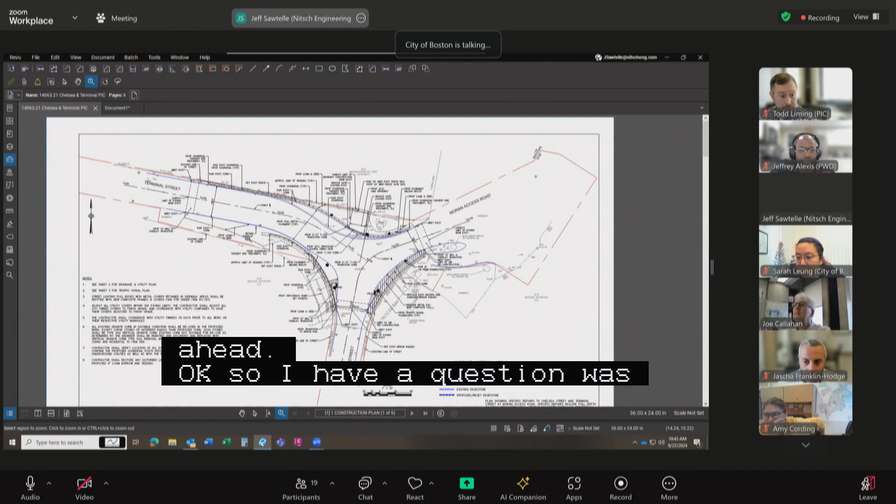This is John O'Donnell with Diversified Automotive at the Boston Autoport. I too do not have a raised hand function, so I hope this is okay. Can you hear me? We can hear you, go right ahead. Okay, so I just have a question. Was there ever a traffic count conducted as part of this project? I do not believe there was a specific traffic count for this project. I believe we used the BTD traffic figures that were provided for us. I will double check and make sure I get that information for the next hearing.

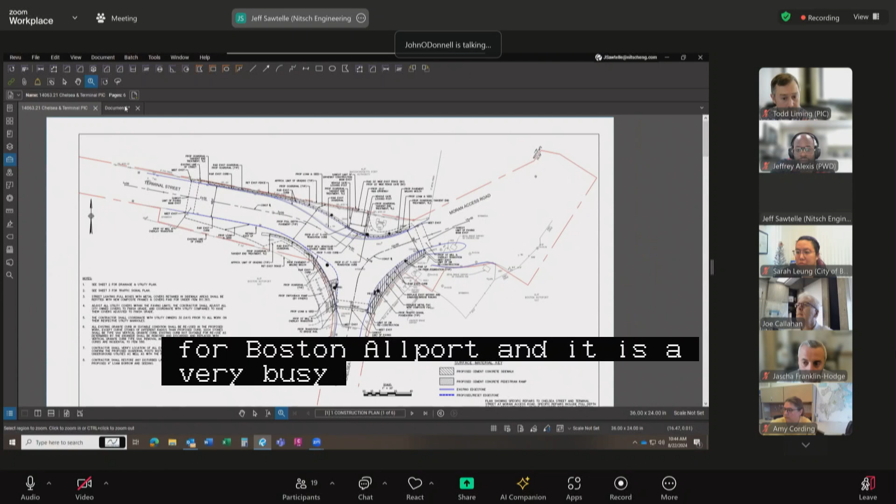So I too have been made aware of some of the plans. It's not my industry to read plans, but one thing I would just like to truly understand is the light cycle that is the future plan, because underneath the Moran Access Road is the main terminal gate for Boston Autoport, and it is a very busy gate. In addition to moving my product by truck and my tenant's product, which is a salt business, which gets very, very busy, across the roadway underneath the Tobin Bridge to the Mystic Pier is my access to my vehicle processing center.

8 years ago, we built a $17 million building there to be able to process the Subaru product, to accessorize it prior to shipping out of the Boston Auto Terminal port. What we do is we load these vehicles onto our car carriers, which are 80 feet in length.

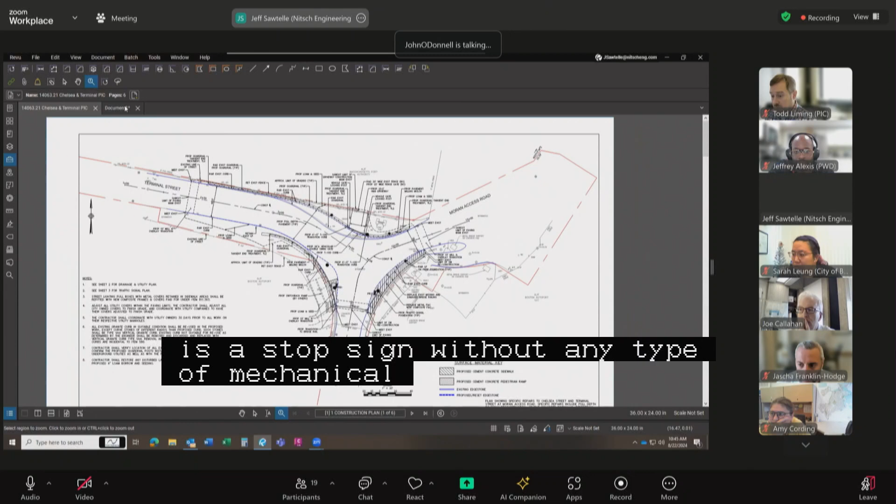Right now there is a stop sign without any mechanical lighting situation that grants the flow of access, which does not impede or block my main gate into the Boston Auto Port. I'd just like an understanding of what the plan is for the light cycle that will guarantee I won't have any obstruction to getting both the trucks for my business, my tenant's business, as well as my automobiles from the Moran terminal over to the Mystic Pier.

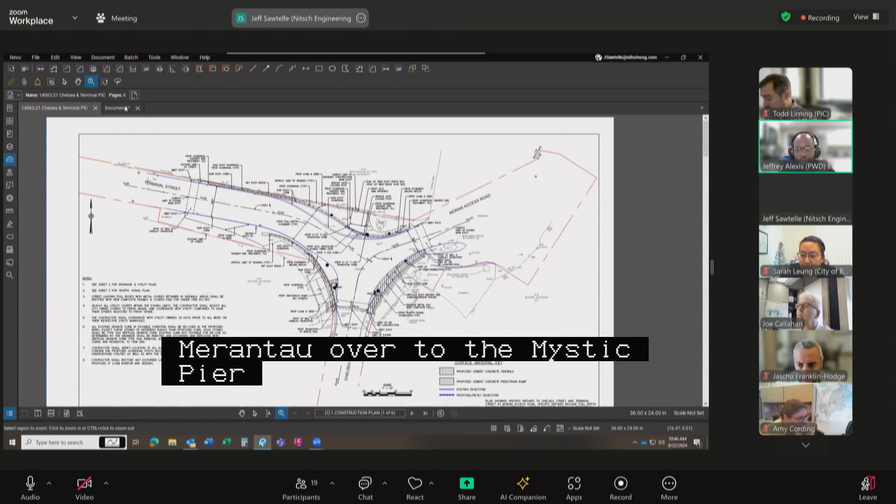Thank you, John. Yes, we have been working with Diversified Auto regarding these plans, as well as the signal phasing and timing. We are making updates to the signal timing and phasing. We did receive comments from the 75-100% design submission from the Transportation Department. We're ultimately going to be taking their direction on how the signals need to function.

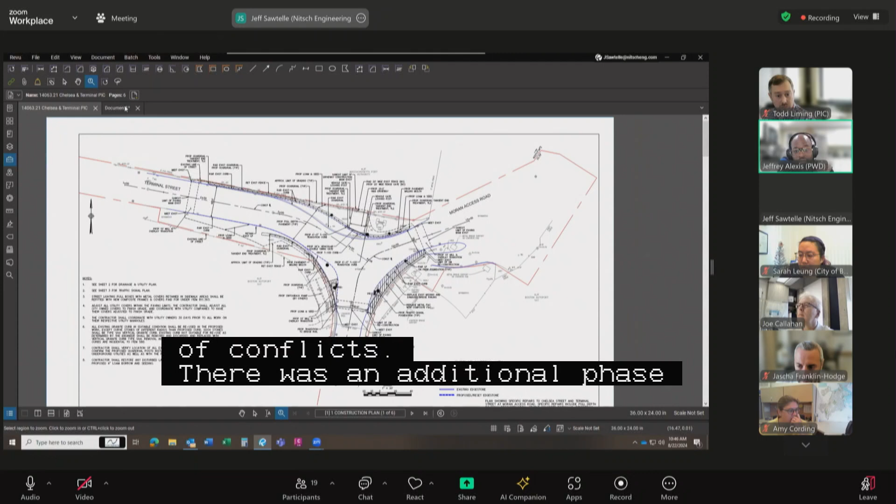The initial proposed design for the signal function timing had some issues in terms of conflicts. There was an additional phase that they requested. We're going to sit down and talk with the Transportation Department to figure out how to make this intersection safe. We understand it's currently just stop controlled, but with the Harbor Walk extension, there's going to be a lot of pedestrians here, and we have to provide additional signal control to improve safety for those pedestrians crossing here.

So we will have those plans and updates for you as soon as we get the actual signal timing and phasing design approved by the Transportation Department. I will share it with you and we'll continue that conversation so you're aware. Ultimately, it's about making this intersection safe for all modes of transportation, and we're going to have to follow that direction.

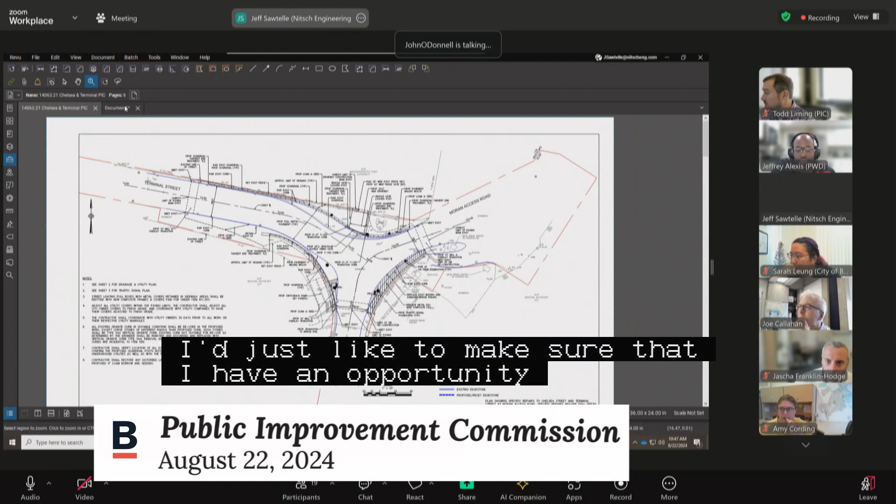Well, I appreciate that, and I want it to be safe as well. I'd just like to make sure I have an opportunity to understand what the plan is. It's just been dropped upon us without a true understanding of how it may adversely affect my current business.

Yes, absolutely. As I mentioned, the intersection will function differently because now it would be signal controlled. But I think the intent of this project and one of its goals is to not impede traffic operations for the auto port. So happy to work with you on this. As soon as we get that squared away, I'll share the signal phasing, and I'll have somebody from the Transportation Department available to answer questions and explain why we need to go in that direction, whichever direction that is.

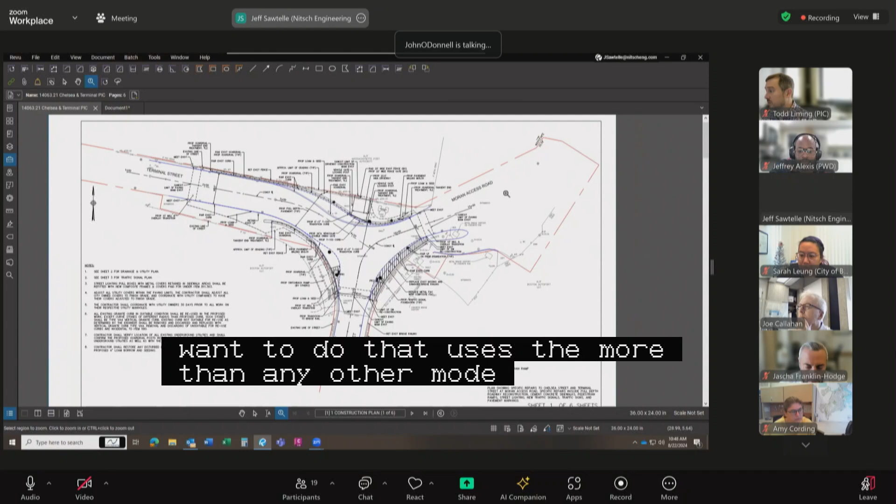I'm not the only leaseholder or property owner down there who uses the Moran Access Road. I don't know if there are any other tenants or property owners on this call, but it would make sense if they were part of this process as well.

Yeah, absolutely, I think I've got a list—just a Rolodex of all the individuals that have been involved in the design from Massport, from Autoport, as well as BPDA. So whenever we get this squared away, I'll send out an invite. I'll give people enough time to invite who needs to be involved in this conversation, and then you'll be allowed to send out invites to that meeting as well. We're not limited in who can be involved in that conversation.

Thank you for your time. Appreciate it. No problem. Thank you.